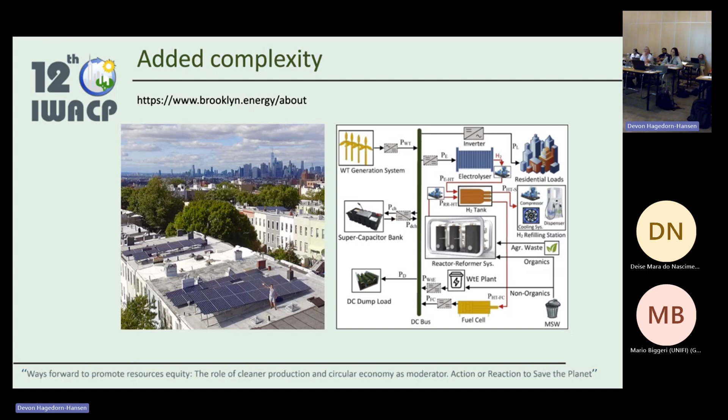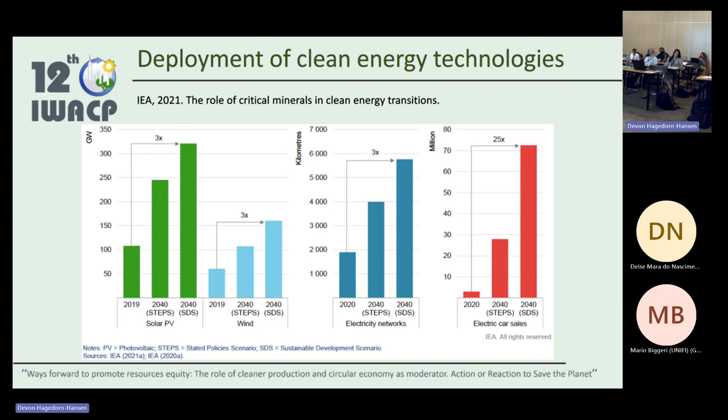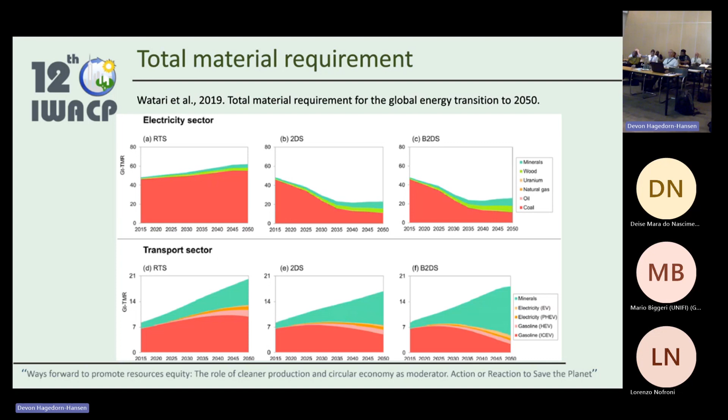So what does it mean? There are 2 studies out of Europe with different scenarios. What you can see here in terms of the electricity sector, as we're ramping down our fossil fuel usage, the green mineral component is growing. The electricity sector and transportation sector is just exploding, basically, as we're moving away from internal combustion engines.

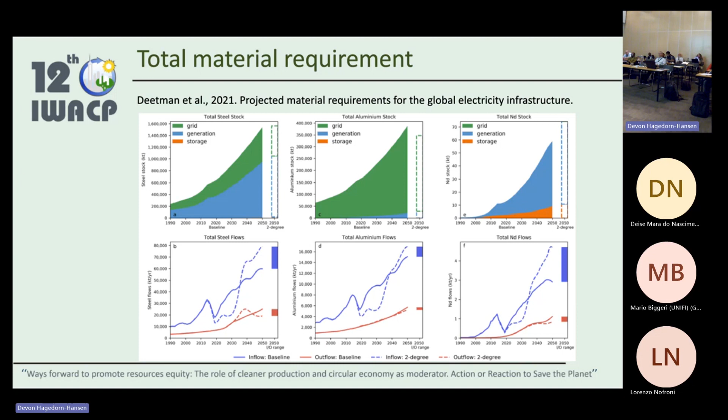Another study looked at, as an example, steel, aluminium, and some of our other rare earth elements, stock really ramping up immensely as we go into this transition. It's sort of interesting unpacking this. I don't know if you looked at the IEA report that came out 2 years ago about the critical minerals for the transition.

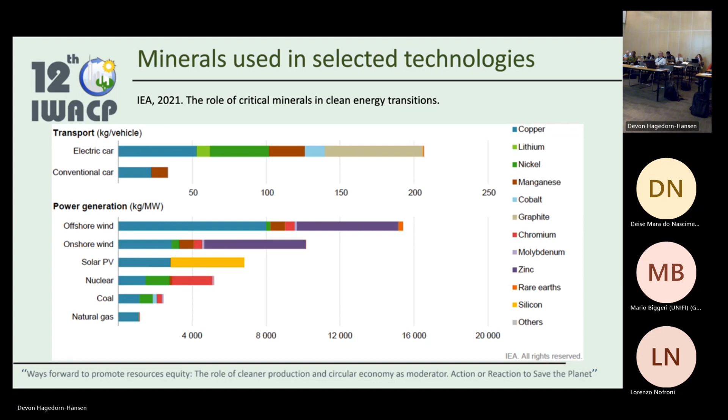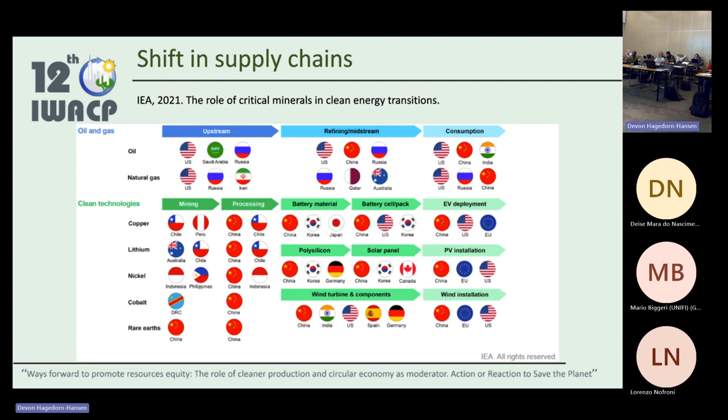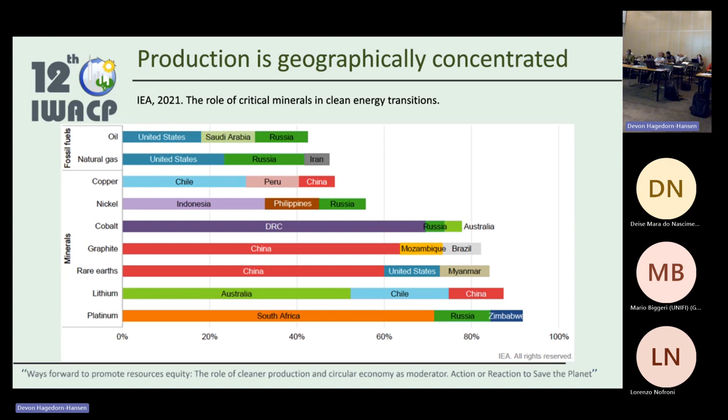China is starting to play the largest role in terms of processing those minerals that go into manufacturing batteries, etc. So we're seeing much more intricate supply chains, but it's quite geographically concentrated. Down here, platinum is largely a South Africa story. Lithium is largely Australia and Chile, with a little in China. But rare earths and graphite are concentrated in China.

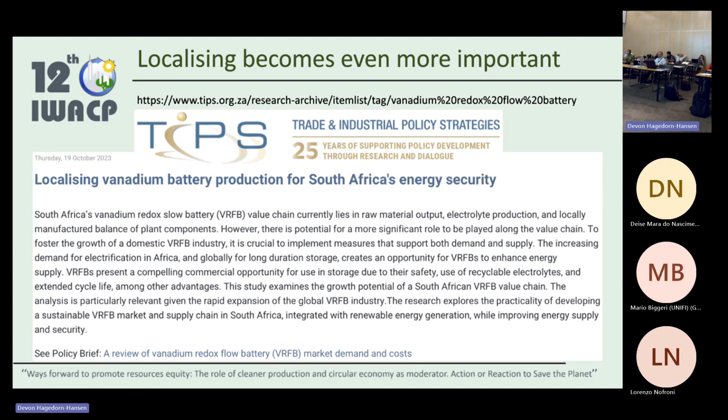Ever since I started my career we've talked about beneficiation and localization, and it's becoming even more important in terms of what technologies we utilize. A report from a trade and industrial policy think tank here in South Africa, released last month, looked at vanadium, since South Africa is a big producer. Vanadium redox flow batteries are an excellent stationary storage option, and this is something we can capitalize on. Rather than moving minerals out of the country, having them processed, and buying the technologies back, what can we do within our own countries to utilize those resources more effectively?

It's also becoming a geopolitical issue. There was an article last month about restrictions from China on graphite, which is used in the anodes of batteries. A while back we also saw that move with rare earth elements—countries are becoming strategic about holding on to some of these materials. So it's heating up geopolitically, and we saw that happen with the electronics industry, but now it's also happening with the energy sector.

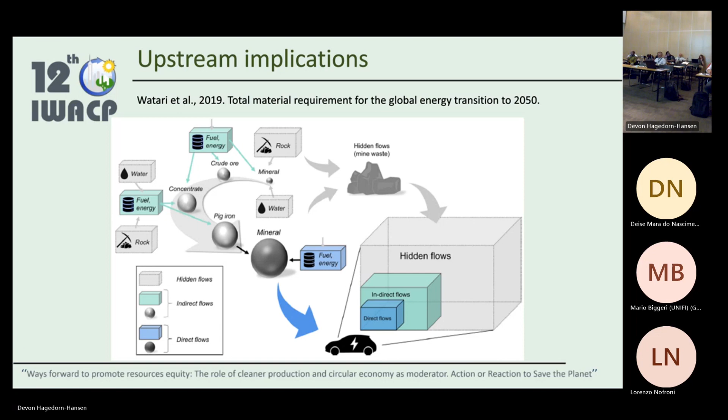We've heard quite a number of presentations over the last two days about life cycle analysis in this community, understanding there are upstream implications in terms of where materials are mined, the energy that goes into that, and the waste material associated with it. I didn't hear too much talk about the water implications, but that's a significant issue, not just with mining but also with the processing of some of these materials. There are some other challenges too in terms of upstream implications.

This was an article in Forbes, I think from the 20th of October, where Glencore CEO Gary Nagle said: the amount of copper needed for this clean energy transition means we will need to mine and produce the same amount of copper over the next two decades that mankind has produced until now, over all of history. So this is a major issue—there's a major copper deficit coming, going back to the electricity system, all the transformers and substations we need, and also energy generation.

The supply of copper is complicated. The resources are there—talking to our geologist colleagues—but the time it takes to actually get a mine going and start producing is just quite time consuming. So this is the real challenge we're facing, and copper is the obvious one because we need such large quantities, but it's the same with other minerals.

That leads us to other sticky issues: where minerals are produced, what the environmental standards are, and certain social impacts. Now we start looking at deep sea mining, which is a very important aspect where I come from, because all of those South Pacific islands are sitting with quite vast offshore resources that could potentially be mined—again, a geopolitical issue.

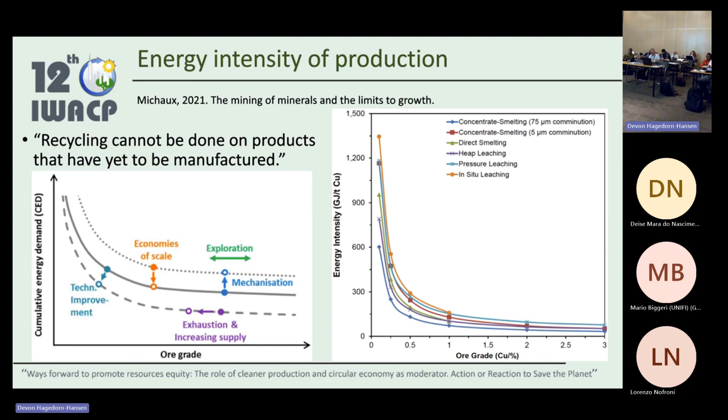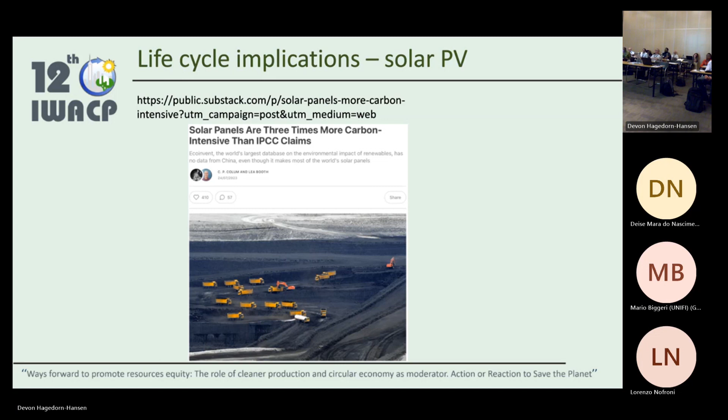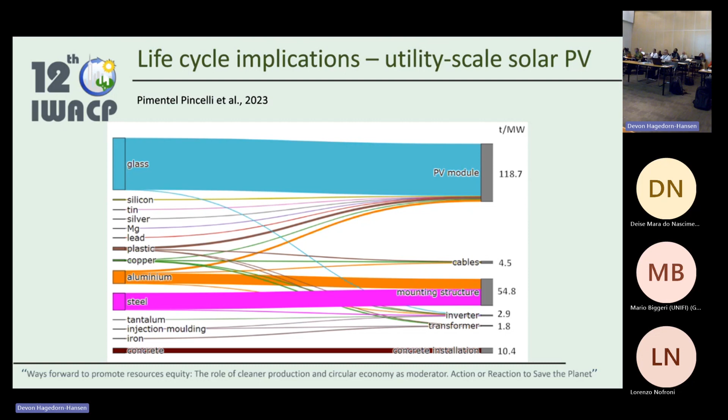As you can see from this graph, not unexpected, in terms of material intensity, it's largely glass, aluminium, steel going into the PV modules, and aluminium, steel into mounting structures. But that's not to say other minerals, even in low quantities, aren't important, because it's quite energy intensive, as I said before, to produce those minerals.

But two things come out of this: more upstream energy efficient processes, and obviously the tech itself. Ten years ago, when we were looking at life cycle analyses of PV modules, we were talking about 20 years of operation. The guarantee for those PV panels is now 30 years. We had to replace the inverter every 10 years; now we can replace it every 15 years.

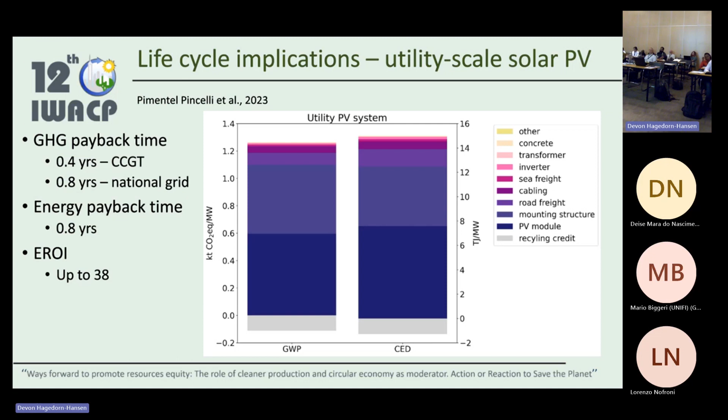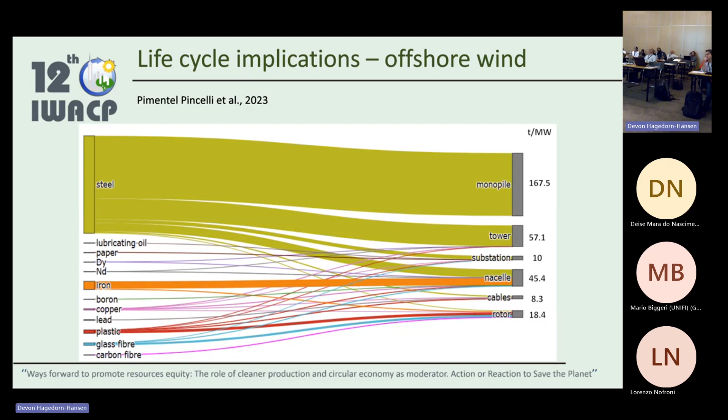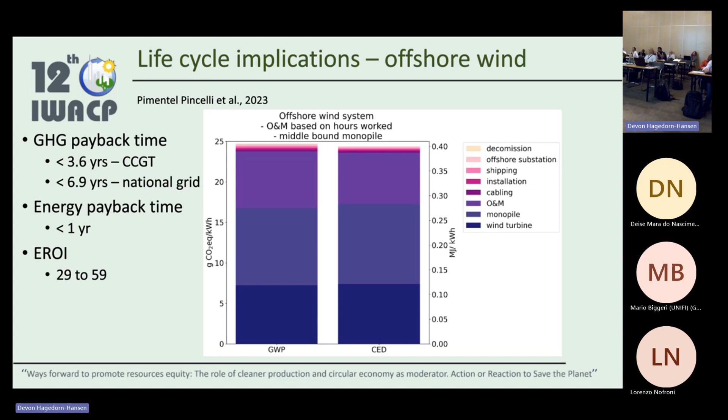One of the key issues this industry is looking at is getting better maritime fuels, or clean fuels. So yeah, this looks less great - less than 7 years payback on it in terms of greenhouse gas emissions. But bear in mind that we're still going to be operating for 23 years. The energy payback still looks pretty good, and the energy return on investment is somewhere between 30 and 60.

So let's continue understanding the life cycle. What else are some of the important issues? More transparency. From the discussions we had yesterday, we need to update our databases, but that means we need more and better data out of our supply chains. Supply chain management becomes really important, and we now have a mandate in our country that you need to provide detailed information about the supply chain - where the materials are sourced, processed, etc.

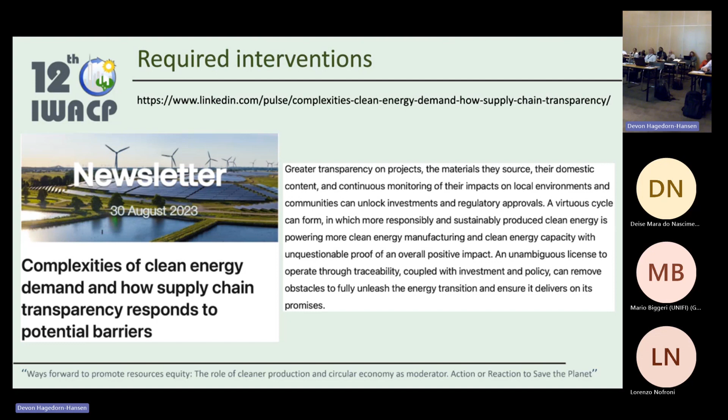And how is that done? Well, there's technology around that - blockchain. I showed you the Brooklyn microgrid earlier on; that whole microgrid market is managed with blockchain technology. But blockchain is also being used as a transparency measure for supply chain management.

Downstream implications - as this community will know, it was mentioned in one session in Australia - solar PV panels that came to the end of their life, farmers are using them for fencing. It's great, but we've now reached a point where it's about 450 million tons of end-of-life solar PV. That's an enormous amount of waste that needs to be dealt with, but typically it went to landfill sites.

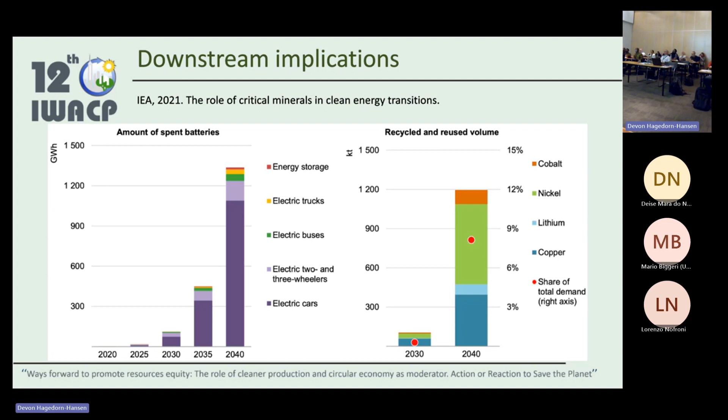And the same goes with batteries. On the left-hand side, from the IEA report, showing how many more batteries we're going to need going forward. On the right-hand side, what percentage of those batteries are actually recycled materials. Even going to 2040, it's still a very small amount for the different materials in those batteries, because our recycling rate or input rates has just been more or less stable.

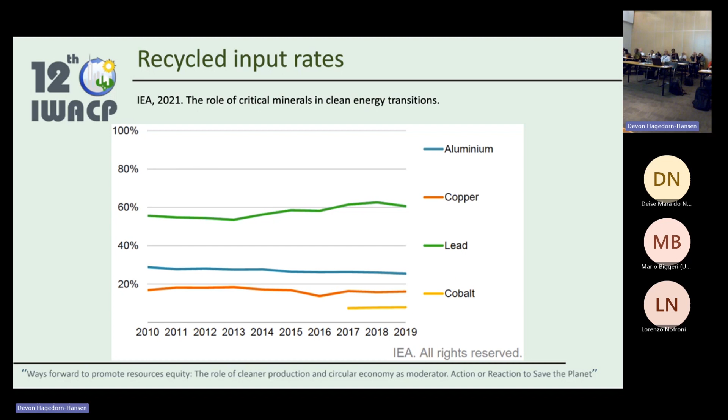Even though we're using more materials and more tech is being deployed, it's more or less bringing the same percentage of that material back into the loop. So this is just telling us that from a circular economy perspective, it's not actually happening. That's one of our biggest challenges over the next coming decades, because we're going to be sitting all over the world with the same situation as in Australia. The USA is having a massive problem with landfill of end-of-life wind turbines, specifically the blades.

So as we know, recycling is crucial, but we need a long-term strategy over the next two decades as we are transitioning. And what's really important for us in our part of the world - we're a small economy, our neighbors are even smaller, so we won't be able to do it without connected economies, so we can get the economies of scale to make recycling affordable and close the loop, so to speak.